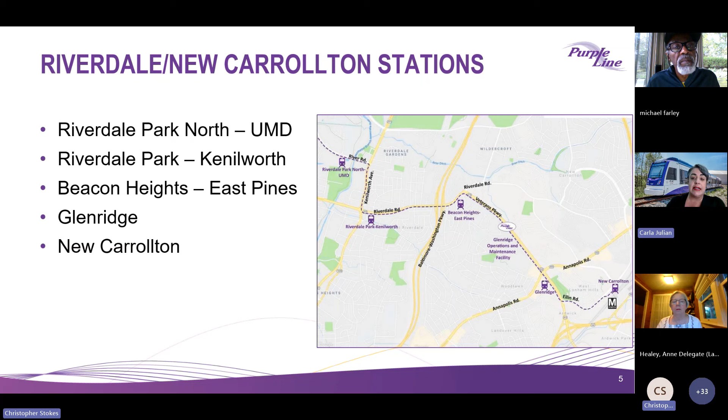And with that, I'm going to hand it over to Ray to introduce the fall progress video.

Thank you, Carla and Stephanie. Again, thank you everyone for joining us tonight. It was a very busy summer here at the Purple Line. So Chris, I don't want to waste any more time. Let's play the video highlighting some of this progress.

Welcome to our Fall Progress Update video for 2024. We are here on Campus Drive at the University of Maryland, where we recently completed a lot of our summer construction work that completed the track installation all along Campus Drive.

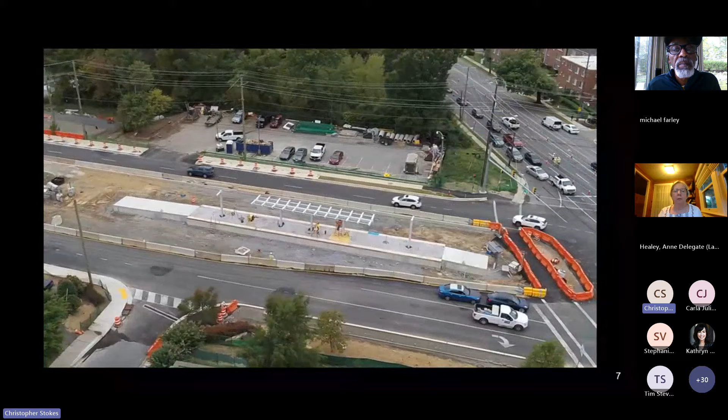We are so excited that we have 5 light rail vehicles at our operations and maintenance facility, and we also completed 10 miles of track across the alignment. Did I also mention that we have over 17 miles of sidewalk that have been installed? Additionally, you can see the colorful canopies that are right behind me, and we have 19 stations that will be in construction by the end of this year. And we are so excited that we are moving forward, completing the momentum on the project, and continuing that going forward.

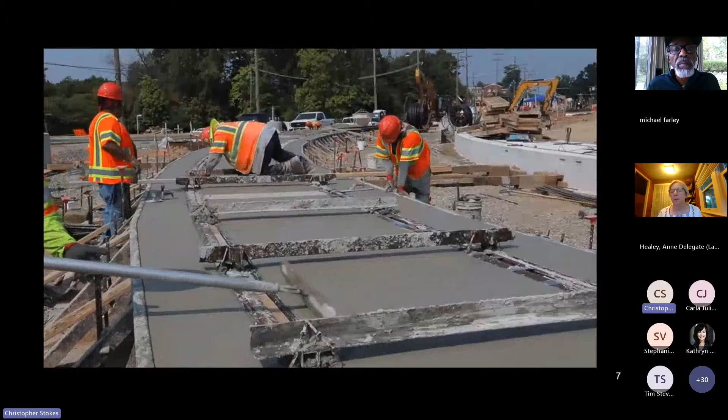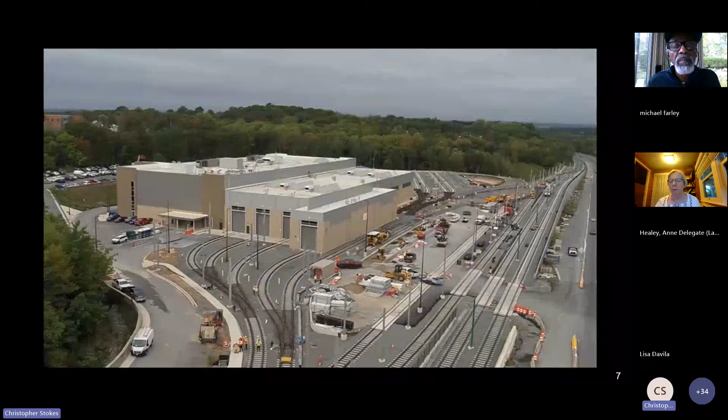Crews have focused on many specific areas to minimize impacts and advance the project. In Prince George's County, crews prepare for track placement by establishing work zones in the center of University Boulevard. Traffic is shifted to the newly completed sections on either side of the road.

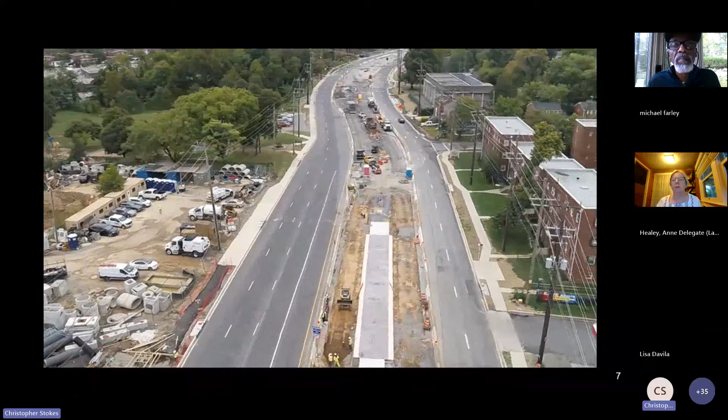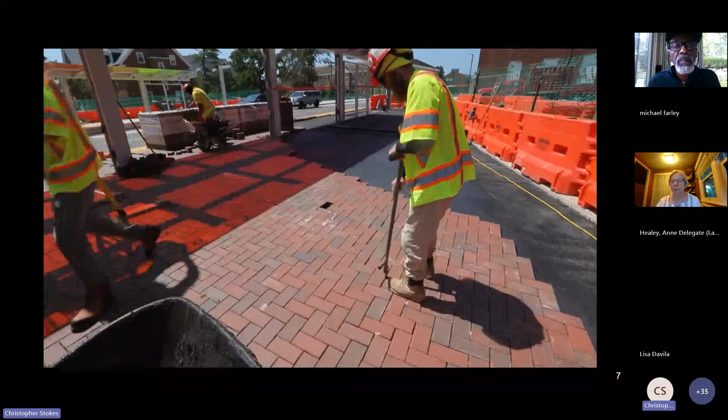At the University of Maryland, crews have successfully completed much of the heavy construction through the center of campus. This year, students arrived to find newly completed sidewalks, embedded tracks, paved roadways, and all lanes open on Campus Drive.

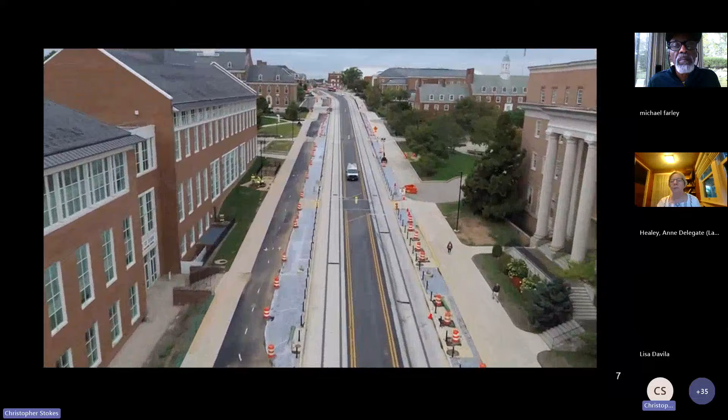Also in Prince George's County, crews opened 2 new roads, 64th Avenue and Mustang Drive. Both connect communities to Riverdale Road at signalized intersections.

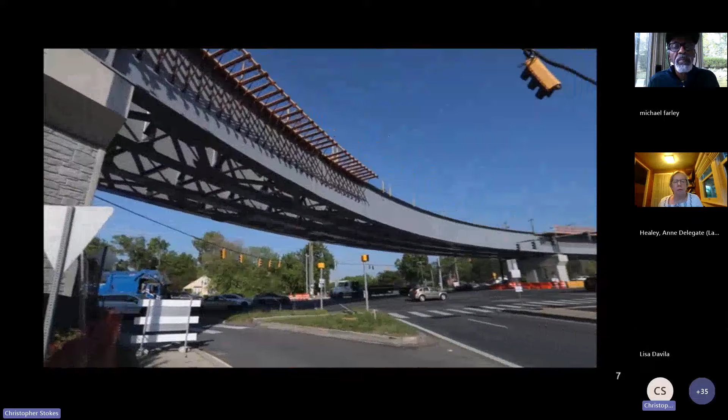The flyover bridge from Kenilworth Avenue over East-West Highway has also been completed. Track crews completed the crossing of Rivertech Court and opened the road 3 weeks ahead of schedule.

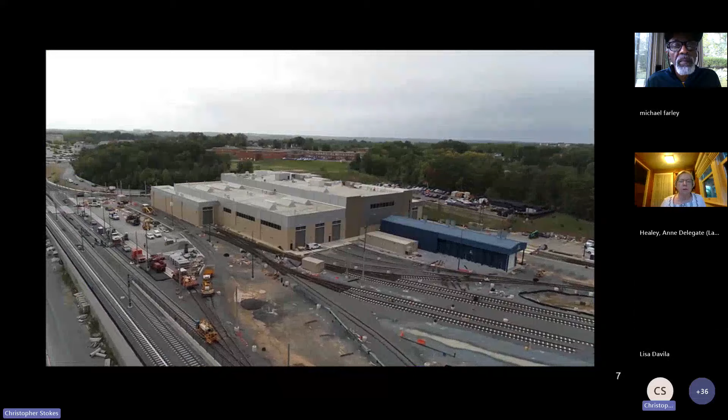At the operations and maintenance facility, the new light rail vehicles are being prepared for testing. I am honored and thrilled to stand here today at our operations and maintenance facility in front of this. Maryland, we have a train.

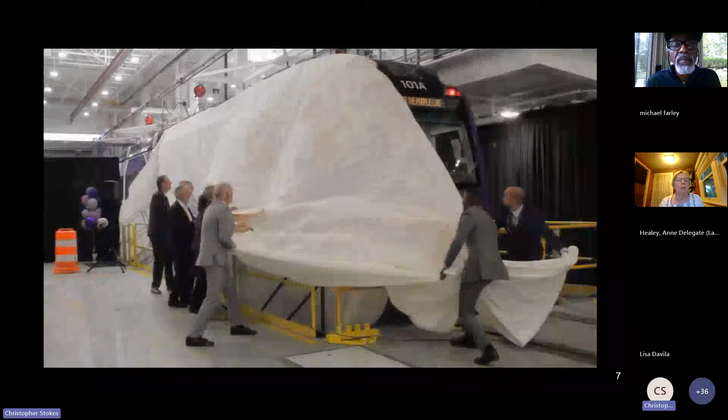Good morning. I'm Holly Arnold, administrator of the MTA, and I am so thrilled to be here today to celebrate the arrival of the first of the Purple Line light rail vehicles. I want to give huge congratulations to the Purple Line team. This team does not sleep. They are working all the time to deliver the Purple Line for Maryland, and I'm so thankful and grateful for them.

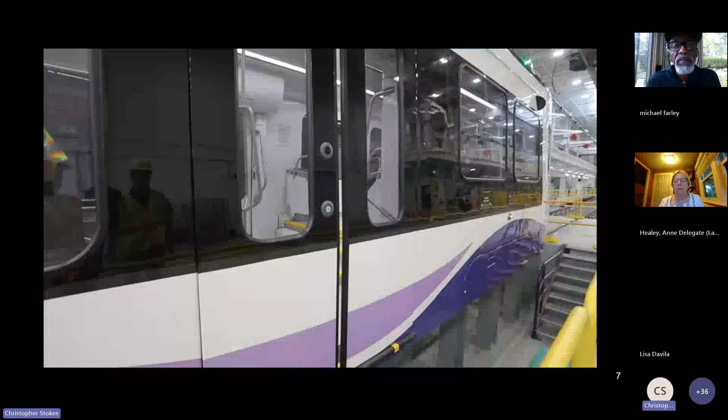These vehicles are 142 feet long. That's nearly half of a football field, almost twice the size of a metro vehicle, and will be the longest light rail in North America. It'll hold up to 430 passengers. There will be 8 bike racks on board, as well as 8 dedicated wheelchair spaces accessible near the doors.

These electric-powered LRVs will reduce energy and carbon emissions, as well as being quieter than other modes of transportation. Over the summer, we worked closely with our partners at CSX, WMATA, Montgomery County Parks, and Montgomery County Schools to complete a lot of construction work and install track across the alignment.

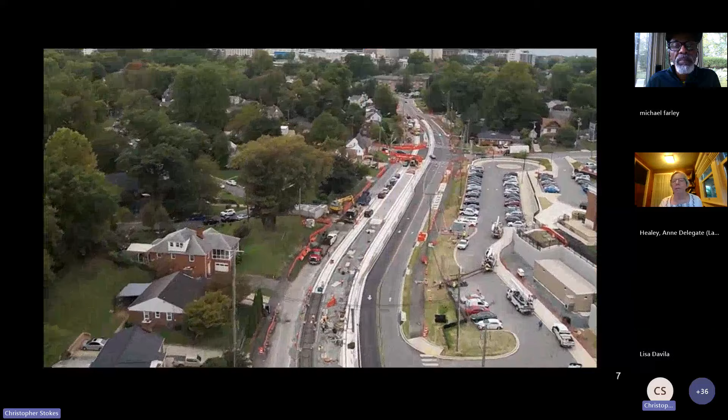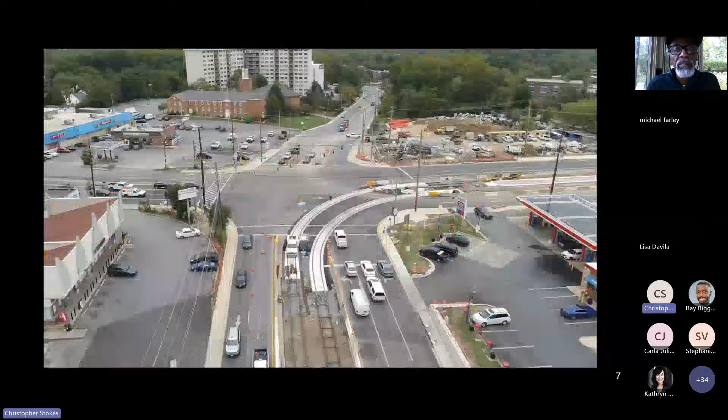In Montgomery County, the Purple Line has successfully placed both sets of tracks across the Wayne Avenue and Dale Drive intersection prior to the start of the school year. They have also installed the complex curved track at Piney Branch Road and University Boulevard, and fully opened the Talbot Avenue Bridge.

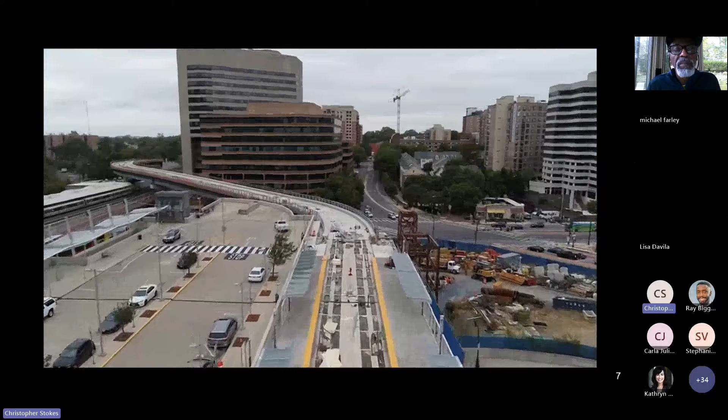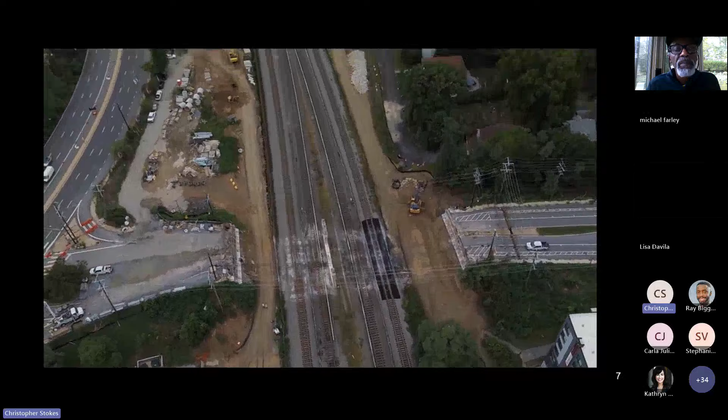At the Silver Spring Transit Center, the LRV bridge over Colesville Road and the foundations and superstructure for the new mezzanine are taking shape. Crews also started work to build a new and improved Spring Street Bridge by completing the bridge demolition during the WMATA summer shutdown.

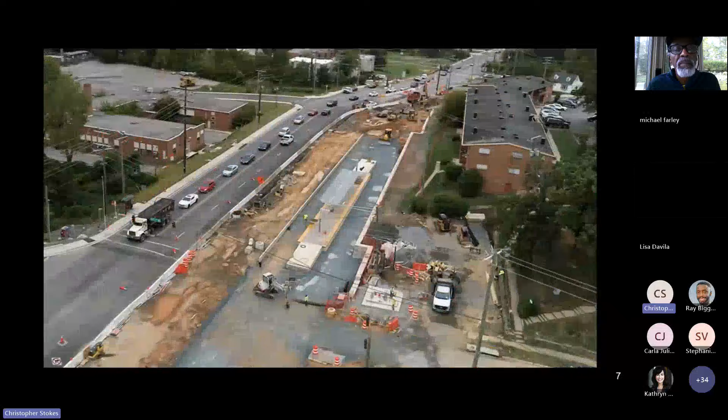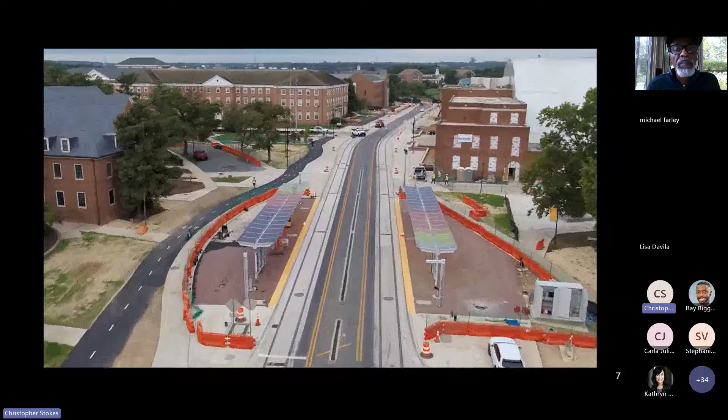Station construction can be seen across the whole alignment, with station after station taking shape. The highlight of the station construction is the installation of the first Art in Transit artwork element at the Campus Drive UMD station. The artists at Legge Lewis Legge added a beautiful display of color that changes throughout the day, a shining example of things to come at the Purple Line.

Thank you again for your patience. While we continue construction, we are going to keep the momentum up across the alignment, moving from laying track into the testing phase of the light rail vehicles. We are so excited about the Purple Line, and we know you are too. Thank you.

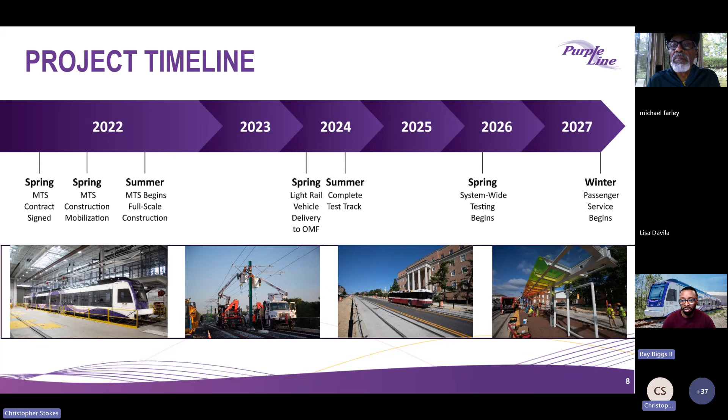So this is the area from College Park down to New Carrollton Station. Just kicking off here with the Riverdale Park North Station, progress is quite advanced along here with the canopy glass installed, windscreens installed, and benches. You get a good idea for what the station's looking like in a close to complete area through here, and then placing security fence around so that we can keep these areas pristine as we continue construction.

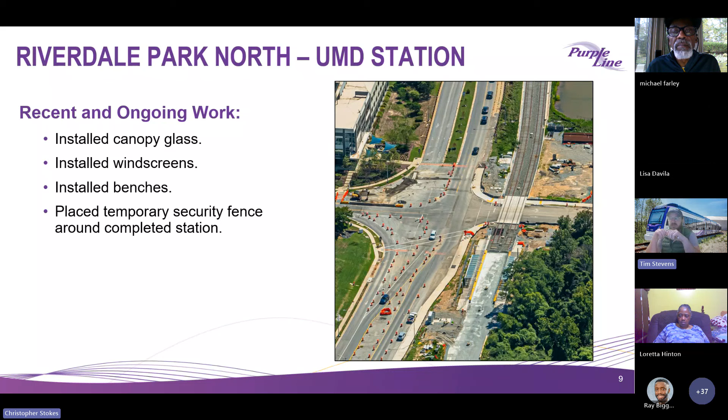Through to the Rivertech court, this is a big one that we had to push through during the school holiday closure. We had a few issues as we progressed through here, but were successful in getting the track in, and actually got it completed 3 weeks before school went back at the local school on Rivertech there.

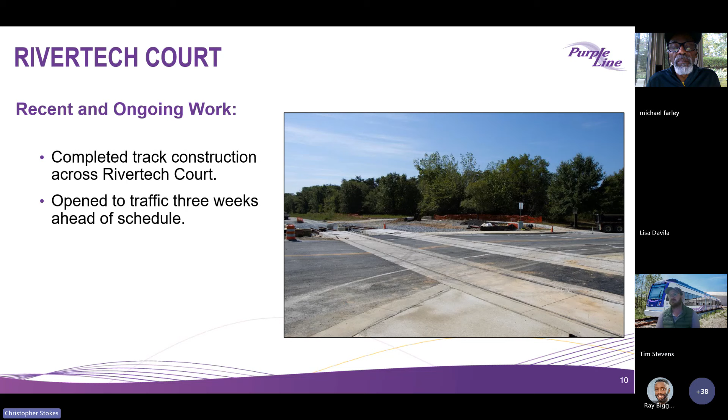Further along River Road, continuing on the intersection work at Haig Drive, we continue to push towards getting that to a signalised intersection as well, similar to what Rivertech will eventually be signalised as well.

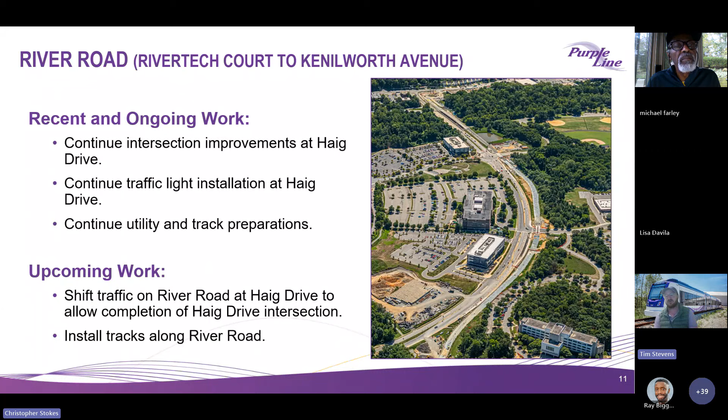We're progressing the majority of our conduit and utility work along this area for the systems, and should start to see the tracks being installed along River Road in the coming few months. We'll really start to see a lot of track construction in this portion of the project. With River Road, there'll be another traffic switch coming up to progress the next and final quadrant of that build out at Haig.

With Kenilworth Avenue, you can get a good idea, especially in this picture, on how it's going to look. We saw in the video at the start how University Boulevard gets split out and the track construction goes down the middle of the roadway. That'll be the same with Kenilworth. In the top half of the photo, the track will progress up onto the bridge, and we'll be extending that pathway. Hopefully just prior to Thanksgiving, we'll extend that center of the roadway all the way up to River Road.

Some ongoing work in this area is the sand filter within the parking lot construction there at the auto parts. We expect to see that completed hopefully over the coming few weeks, and get some further construction in this area, which would be nice to see.

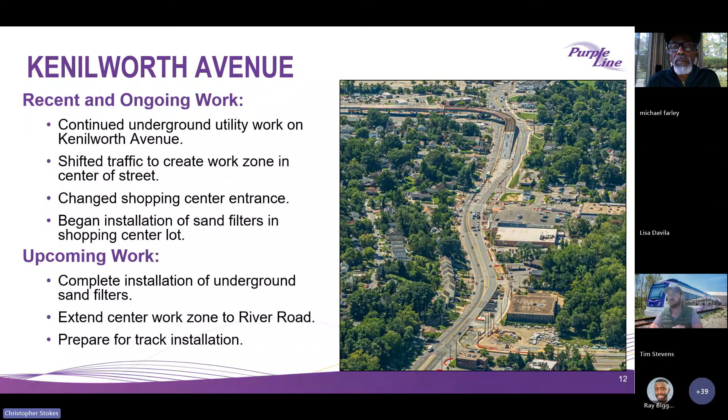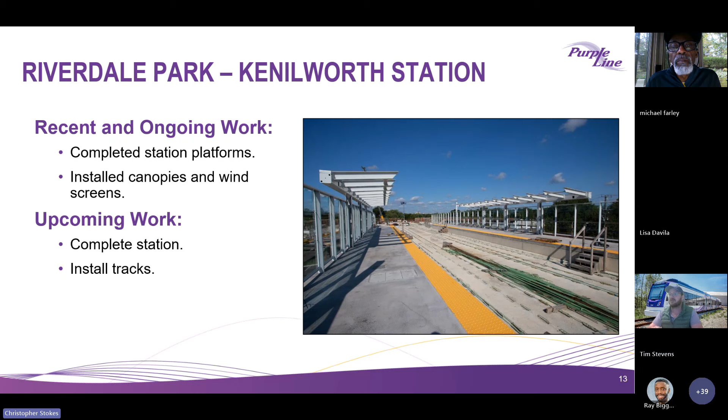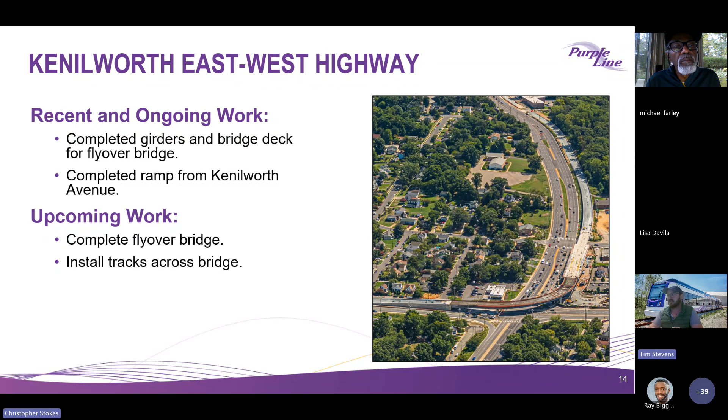Further along on the east-west highway, like I just mentioned, we've completed the girders and the bridge deck, so it's progressed a little bit from those photos. We're installing the track here, hopefully this year, on that bridge.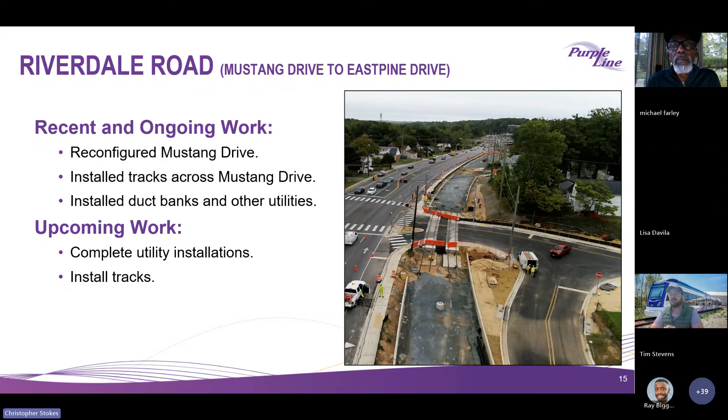This shows a bit more detail on the reconfiguration. Mustang now lines up a little bit better with 62nd than previously. 64th is reopened, and we have closed off and will be working on the cul-de-sac construction of 63rd and Eastpine Drive.

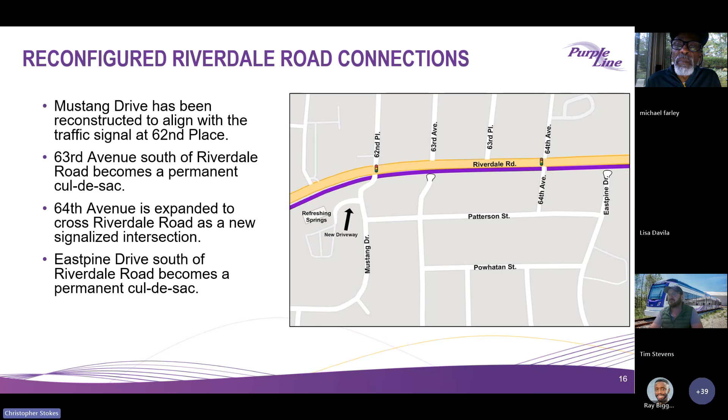Down towards the bend of Veterans and Riverdale Road, we can see the Beacon Heights station coming along nicely, which coincides with the 67th closure we currently have. The station itself — you can see we've built the wall behind it that sets up the alignment of the track, and we hope to continue this station, making it look more in its final format over the coming next couple of months with the track installation. It'll look as it will in permanent configuration.

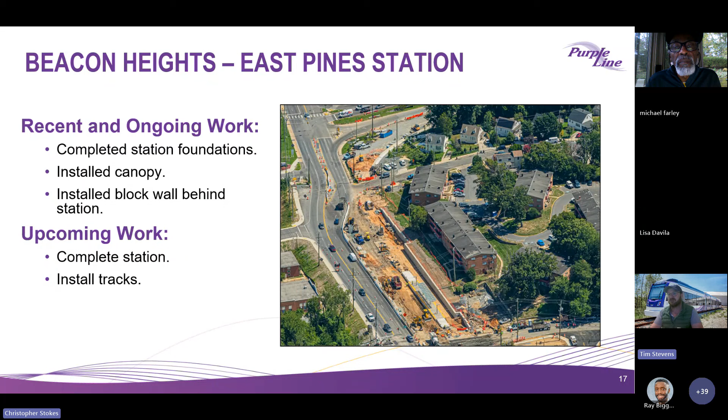With 66th and 67th Avenue, if you've traveled this area, it's a busy little section of work. You can see how much resources we're putting into this area to try and accelerate through and get this completed as quickly and painlessly as possible for the traveling public. We've got the 67th closure at the moment. We're targeting end of this month to get that area reopened under a full signalized intersection, which will come with the temporary closure of 66th Avenue and the permanent closure of 67th Place, which will become a cul-de-sac at the end there.

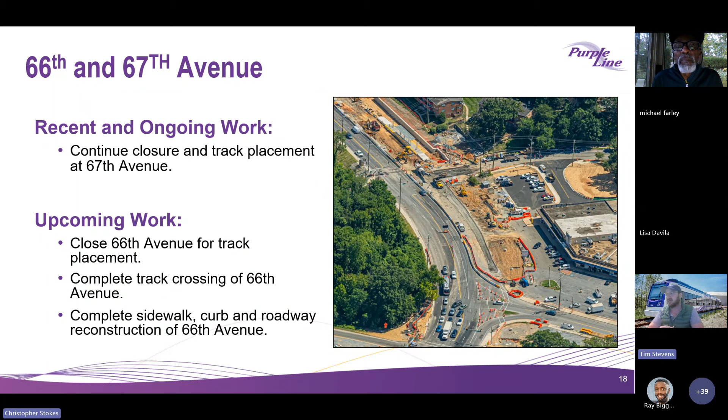66th will be closed just temporarily while we build the embedded track portion through here. It'll be a concrete track similar to the ones we saw at Mustang Drive and Rivertech, and then we'll get that reopened up again in the near future.

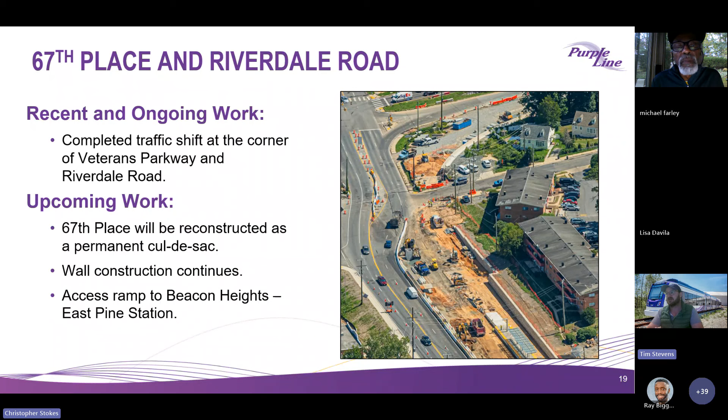Further down to 67th Place, down to the corner, we essentially continue that wall around the corner, which will take the place of what was 67th Place, so that we can set this track up to take the corner and take the trains around that reasonably tight little bend down onto Veterans Parkway.

Onto Veterans Parkway, this is what the ballasted sections of the main rail system will look like on this project as it flows and progresses from this area through the full alignment to Bethesda. The ballasted track is installed, the OCS poles and catenary poles have been installed, and the OCS contact wires have been installed. Matt will give more information soon on when we expect to start seeing trains running along this track.

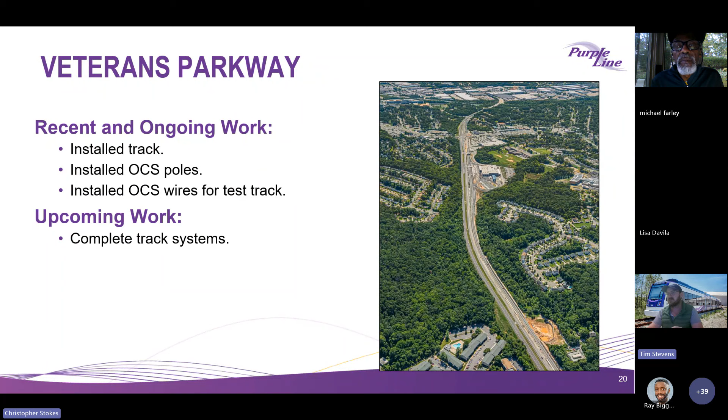Through the operations facility, we've completed track installation in this yard and completed the stormwater drainage. We've been receiving LRVs and continuing OCS installation in the back portion of the yard, hoping very soon to complete the transition of this from a construction area to an operational facility servicing the entire alignment.

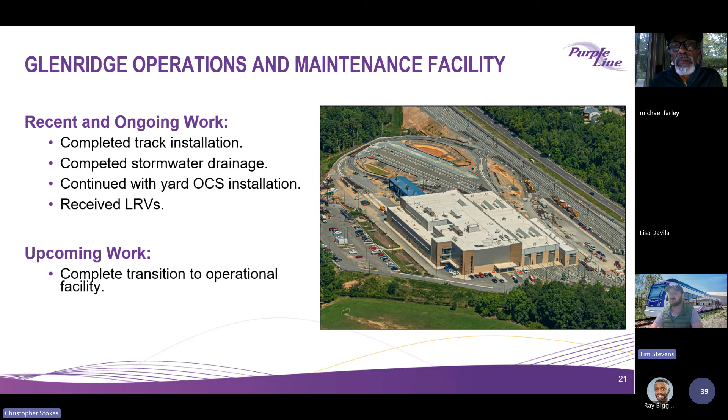Through to Annapolis Road, we're pushing to get this into a permanent resolution. We've completed 2 of the 3 phases and are currently in the 3rd with track installation ongoing. We hope to see that track finish this week so we can progress into the next phase, building out the complete intersection with new traffic signals and pedestrian crossings over the next couple months. There's a bit more work to do here, but we're progressing as quickly as possible to the final resolution.

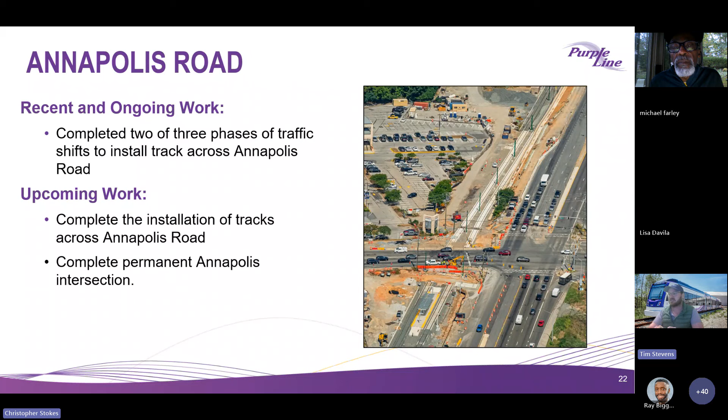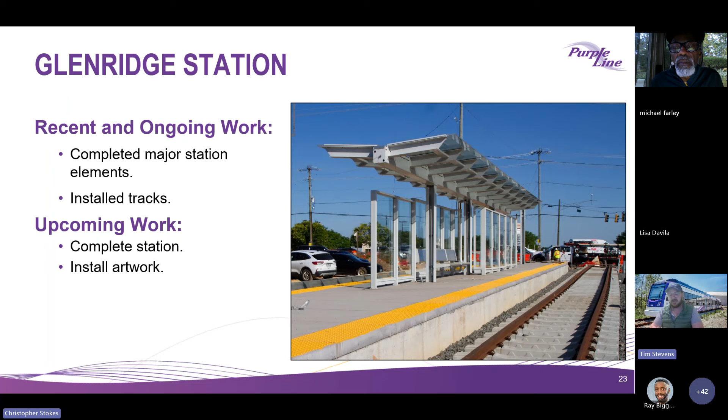Coming up early next month will be the temporary closure of Emerson Place. We're pushing to get the track installed there in a 2-week shutdown, and then we'll reopen from Emerson Place all the way back to Veterans Parkway, with one side opened to 2-way traffic so residents can get through to Veterans again. After that, we'll complete a closure from Emerson Place down to flow into the New Carrollton WMATA facility, where the alignment ends.

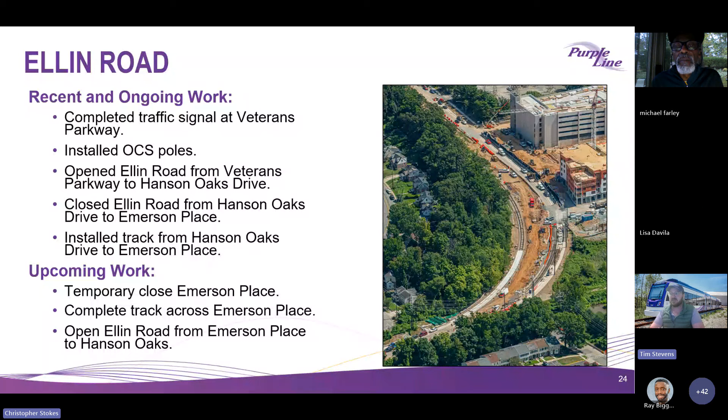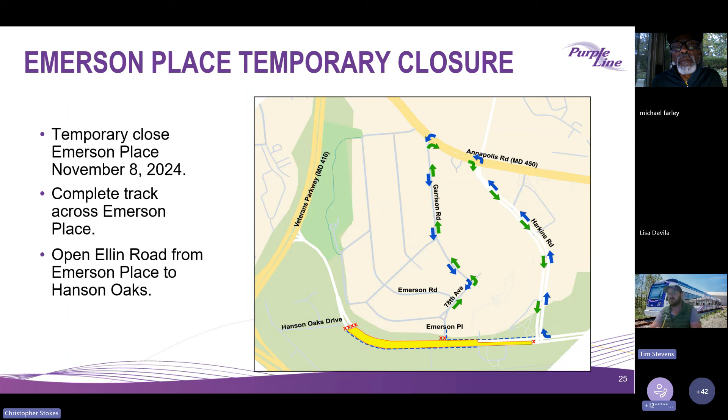This is showing the Emerson Place temporary closure. We're targeting November 8th for this, to complete the track and have it reopened, with the target being to reopen by Thanksgiving. This is the detour planned along the alignment there.

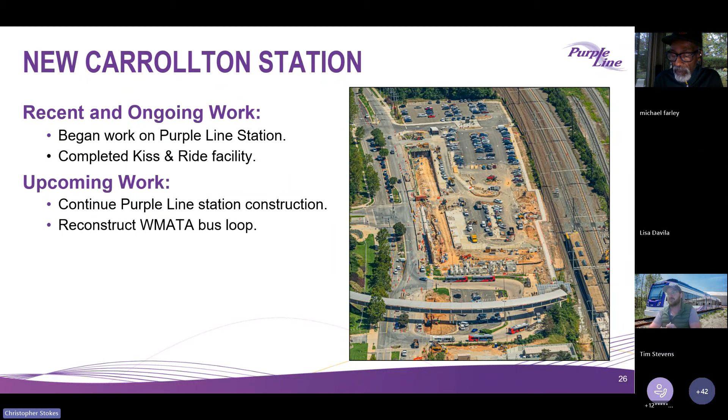And then handing over to Matt Prpich.

Matt, you're on mute. You're on mute. Sorry about that, guys. Good evening, everybody.

I'm going to jump into some exciting news here, as alluded to by some of the other members. The test track along Veterans and the testing upcoming this fall. As Tim showed us, the track work is complete along Veterans and through the OMF maintenance facility, approximately 1 mile parallel to Route 410, Veterans, between Annapolis and Riverdale Road. This test track was chosen for its seclusion from the roadways and provides us a place to test our LRVs to make sure they are performing and meeting the operational standards they were designed to.

Looking forward to getting these things out there for their proof of design and getting to see them travel up and down the tracks.

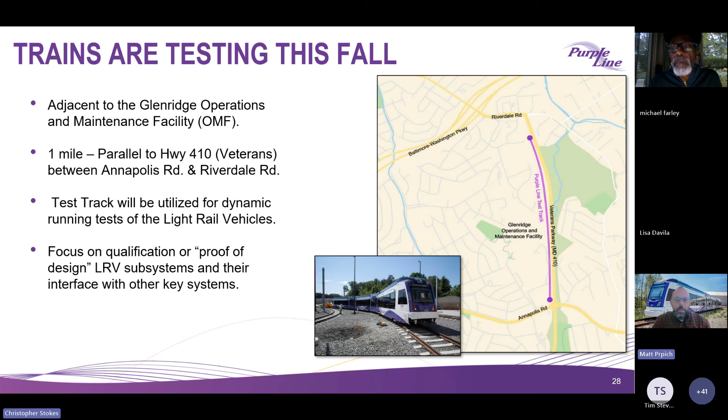Okay, so the testing of the trains. A couple of things that are going to be tested: the braking systems and the propulsion systems. Are they stopping and accelerating as they were designed to do? As well as some of the other vehicle safety systems, the automatic vehicle location systems and emergency communications on the LRVs.

This also provides the opportunity to start training the actual train operators or drivers, as well as we've been undertaking training with our local first responders. So we have the local police and fire departments joining us in our facility for trainings on the new system and the new vehicles, establishing the procedures needed to keep everybody safe and respond to any emergencies on the system.

One thing we really want to touch on is the site safety of this test track. There will be no road crossings with the vehicles during the testing phase, and they will be contained within the dedicated alignment. So we won't have any interactions with the public at this point of testing, and the vehicles are equipped with state-of-the-art overrun protection. Even in the event of some type of personnel emergency with the train operators, they are equipped with automatic protections that will react and stop any moving trains.

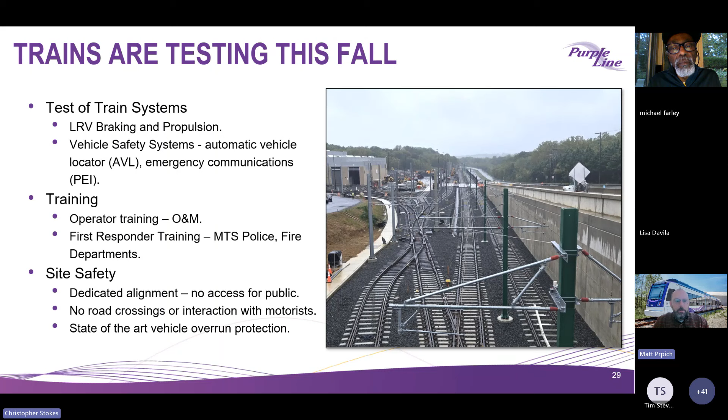As others mentioned, we do have the 5 LRVs. They've been delivered to the facility, assembled, and static tested, meaning they've been run through the paces in the shop and their systems checked out. The track work for the OMF facility yard and the test tracks and accessory tracks has been completed. Inspection and testing of those tracks is ongoing and in its final phases.

We have the OCS installed, which of course will power these trains, along with the traction power substations that power these systems. This is all wrapping up in the testing phase, leading to our ability to get these trains out there and moving up and down the track.

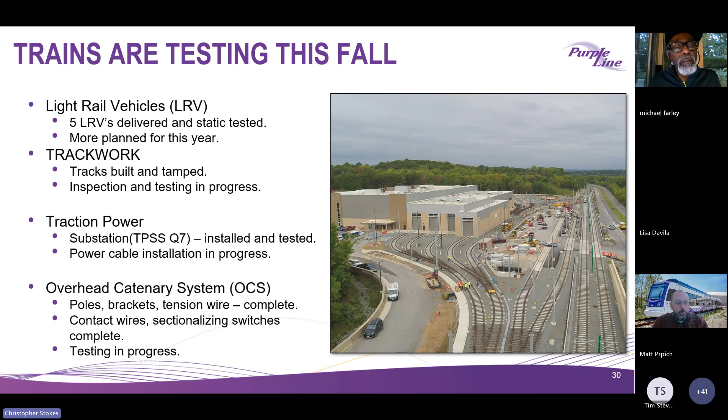Safety being the top priority always, LRVs will be seen in this area. We do want to mention that we appreciate everyone's accommodation in respecting that and not trying to enter the facility or anything like that when trains are moving. We will have our safety fencing and barricades and everything in place. So it's important to remember that we are entering into this operational phase of testing the trains on this track, and we appreciate everyone's respecting of those safety delineations and fencing.

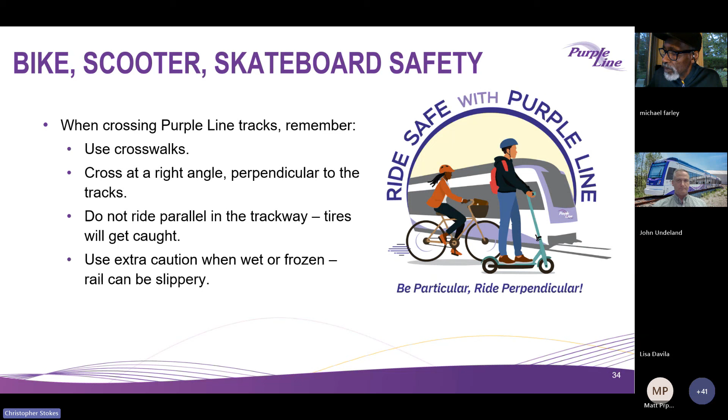They're a group that collects new and gently used building materials and household items, like washing machines and the like, to make them available to the community at low cost.

There's additional information on our Beyond the Rails program on the purplelinemd.com website. With that, I'm going to turn it back to Ray to talk about our new and improved website.